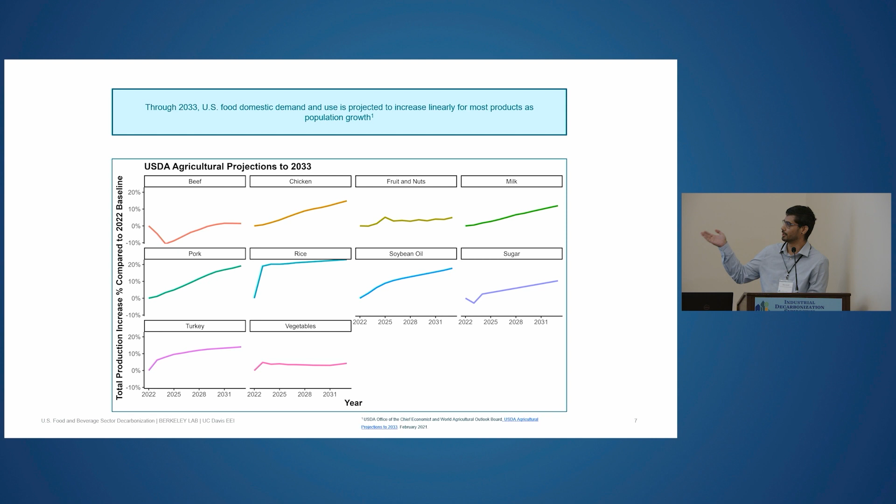To contextualize the US food and beverage sector, looking at the F&B facilities and how production is projected across 2033: USDA projects a linear increase in many food commodities and products across 2033, increasing all the way up to 2050. You can see in the graph below that there are a lot of products that will see up to a 20% increase in production. So we're already having to decarbonize whatever is in front of us in terms of emissions, but there's also a lot of hard work needed in the coming 10, maybe 20 years, across 2050.

There are about 41,000 F&B facilities in the US, and they generate around 8% of US overall industrial emissions. In the diagram on the bottom left, you can see it's more than cement, and almost equal to iron and steel—so it's an energy as well as emissions intensive sector, that's for sure. It also represents 2% of U.S. economy-wide emissions, so that's a lot. This diagram on the bottom right is from the Manufacturing Energy Consumption Survey, 2018 MECS data from US EIA.

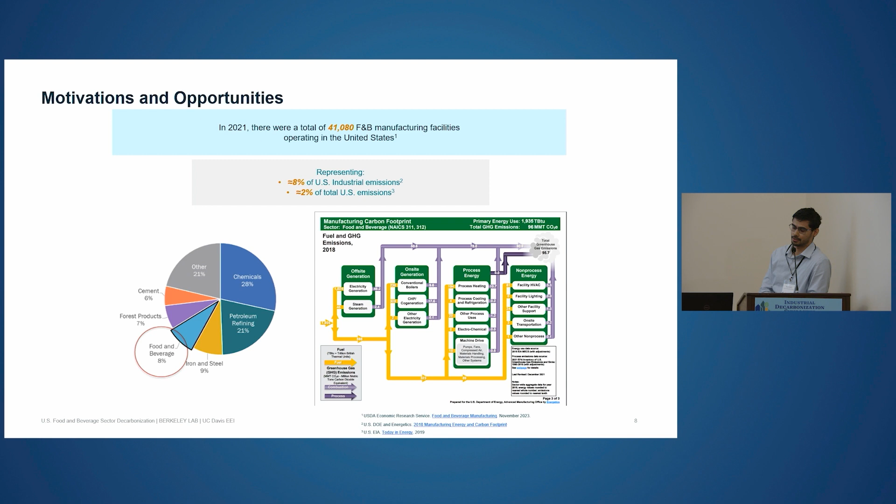So what it pretty much tells you is the scope 1 and scope 2 emissions on a national scale is divided in a ratio of around 50%, right? All the way on the left of that chart, you can see it's around 48 million metric tons for purchased electricity related scope 2 emissions, and overall emissions is 96 million metric tons of CO2e, which is on the top right of the chart. And then the remaining emissions, which is...

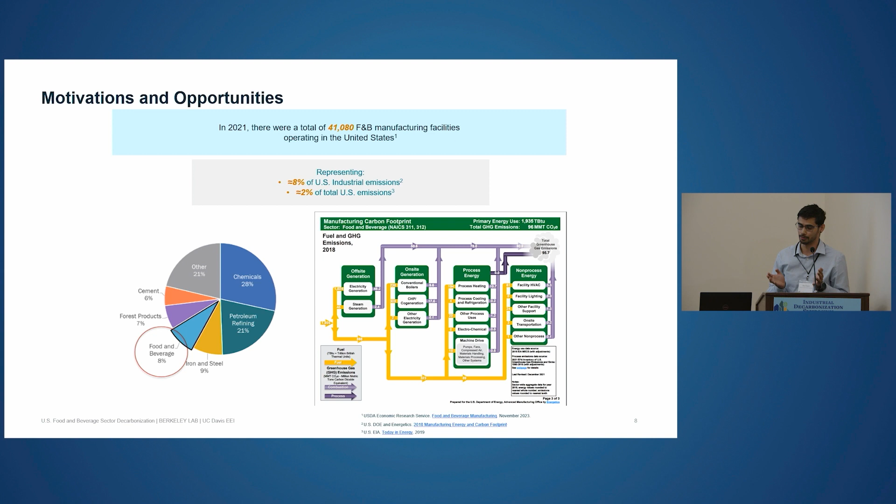...the remaining 48, that's really your scope 1 emissions, mostly from stationary combustion within the sector. And that's a lot of emissions. These are primarily driven by your CHPs, your boilers, your process heating, your HVAC, and all that. So we really need to look into that. That's what we tried to look into here.

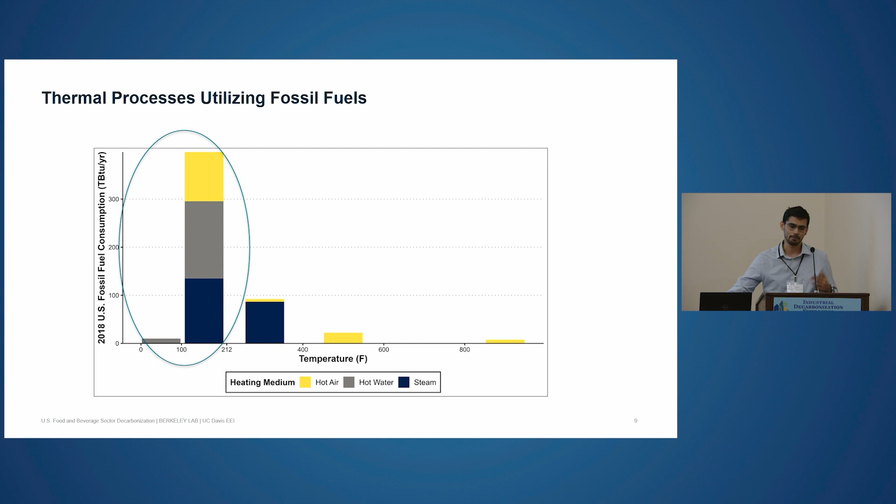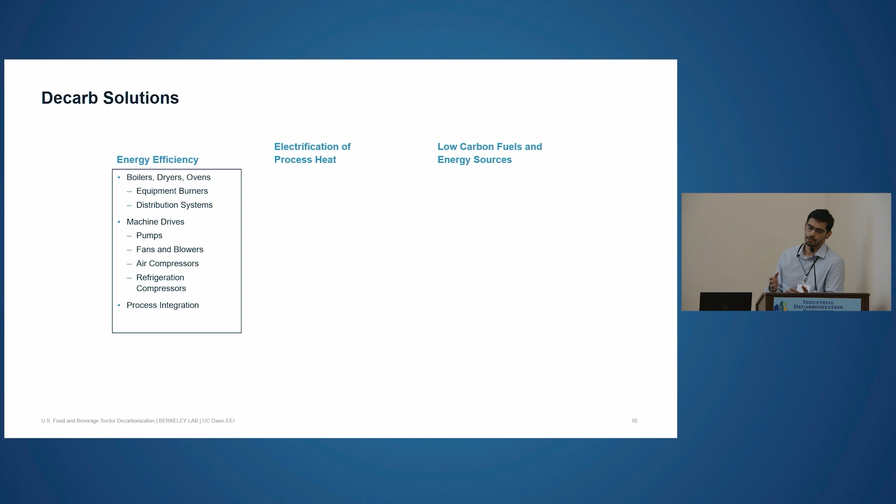From our collaborative work that Prakash and I are doing for the Industrial Efficiency and Decarbonization Office from DOE, on the industrial decarbonization roadmap report, we've identified 3 different decarb pillars. As per DOE, there are 4 decarbonization pillars, but we thought the scope of CCUS for this sector is limited. There might be cases here and there, but it's not really as representative. So obviously there's EE trying to look into equipment level, but not just that, we also need to be looking at distribution systems, right?

Even if you electrify some of your thermal equipment, you're still going to have the distribution system, and they need to be really efficient. Machine drives, process integration, so you can utilize different heating and cooling processes and integrate them with heat exchangers or heat pumps, and that's going to reduce energy consumption.

Electrification of process heat - hot water and steam generated by heat pumps, they have a lot of scope. This sector primarily will be driven a lot by electrification. That's why these equipment are really important.

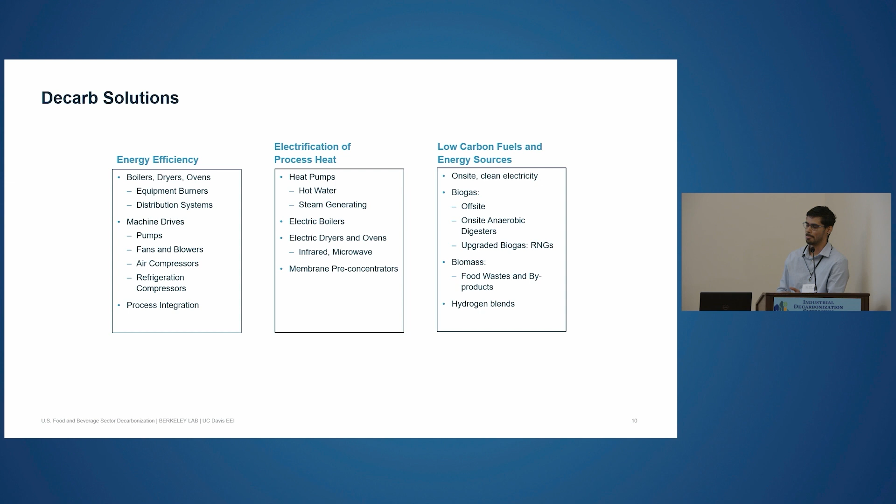And then there's low carbon fuels and energy sources. So generate your own on-site clean electricity, but also biogas. You can get off-site biogas, but you can also utilize your food waste, which is really prevalent within the sector, to get on-site anaerobic digesters originating biogas. And if you have a lot of it, you can upgrade it and utilize it as RNG or sell it as well.

There are additional opportunities in terms of advanced combustion as well as refrigeration. So there are a lot of different decarb solutions for the sector, and this is by no means a comprehensive list, but this was some of the stuff that we looked at.

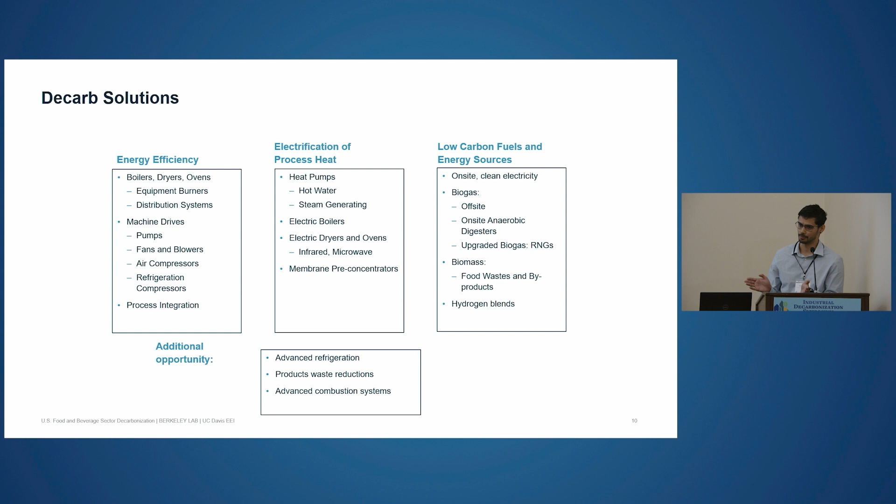Now, with that being said, we wanted to contextualize the food and beverage sector. There are around 6,300 facilities operating in California. These 6,300 F&B manufacturing facilities represent around 15% of the total US facilities, and that's a lot, and it's by far the largest. I think the second is Texas, which is around 4,000 facilities. So California is by far the largest.

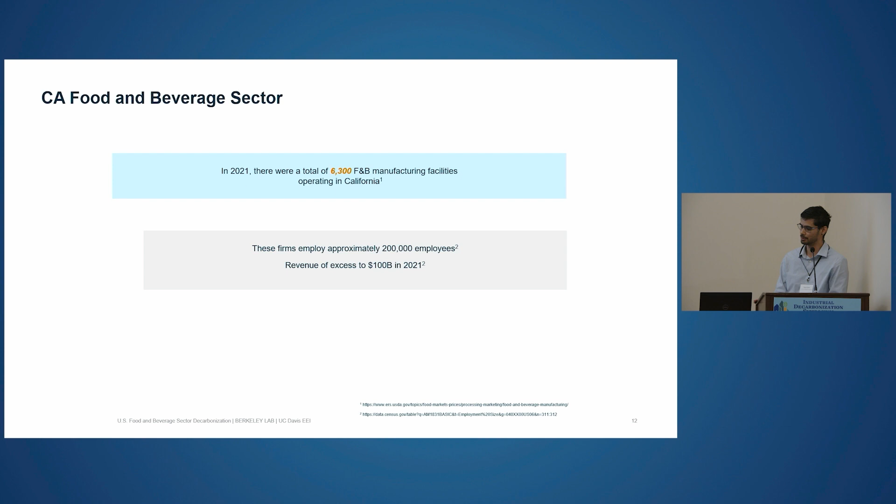A lot of revenue, a lot of people being employed, and also a lot of emissions. It represents greater than 7% of US F&B sector Scope 1 emissions. This is based on 2022 CARB mandatory GHG reporting program. These are only based on the facilities that really reported to the program, and there were around 100, so we're still not including all the thousands of different F&B facilities here. So they do represent a lot of Scope 1 emissions, as well as Scope 2, obviously.

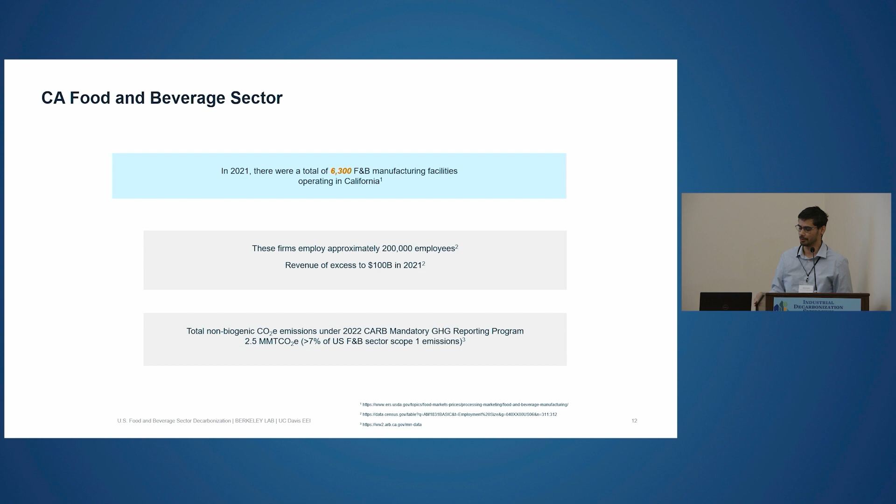So to look at a prototypical facility that might be operating in California and quantify the decarb solutions and their importance and their carbon abatement potential, we developed a prototypical food facility. This is based on 2018 MECS data, and you have your usual high-level processes: boiler, process heating, CHPs, and all that.

We utilize a Sankey tool, which generates this Sankey diagram on the bottom right. This is a tool we developed with our collaborative effort between LBNL and UC Davis. It's on the industrialdecarb.lbl.gov website. What it really does is generate a carbon flow of your facility. Based on whatever energy your processes or equipment are using, you just plug them in and get this diagram.

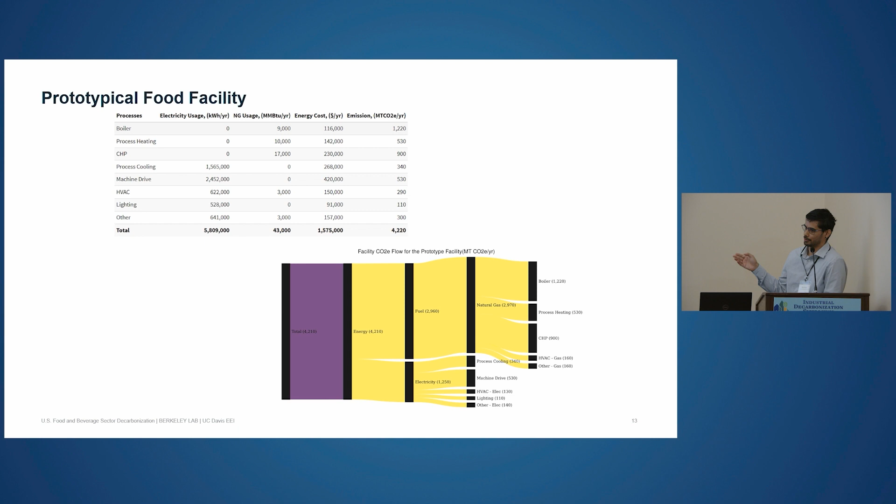So that's really the emissions. As you can see, it's a bit different from the first chart that I showed, in the sense that I mentioned the Scope 1 and Scope 2 emissions is 50-50 on a national scale. But if you look at California, it's more like 70-30, because the grid is cleaner in California compared to national grid emissions factor. So it's a bit different, and we're really looking at Scope 1 emissions. Not to diminish the importance of energy efficiency in your electric equipment, but yeah.

So this is basically the gist of the result. We looked at, for the year 2022, two different scenarios: one without energy efficiency, and the second one with energy efficiency included. In the first, we included just electrification and low carbon fuels. In the second, we included electrification, low carbon fuels, and energy efficiency. We did this to highlight the importance of EE in terms of carbon abatement, but also in terms of what the cost implication looks like when you do energy efficiency and when you do not.

So the first diagram—this is another of our tools that came out through our collaborative effort with UC Davis Energy Efficiency Institute. It's called an LCAC plot generator. What it really does is create a graph that has annual carbon abatement on the x-axis and carbon abatement cost on the y-axis. So it's an LCAC plot, that's levelized cost of abated carbon, or avoided carbon, whatever you want to call it. It contextualizes, or puts these different measures on a graph, and lists out what the cost would look like if you want to implement it, and how much carbon it's going to abate on the x-axis.

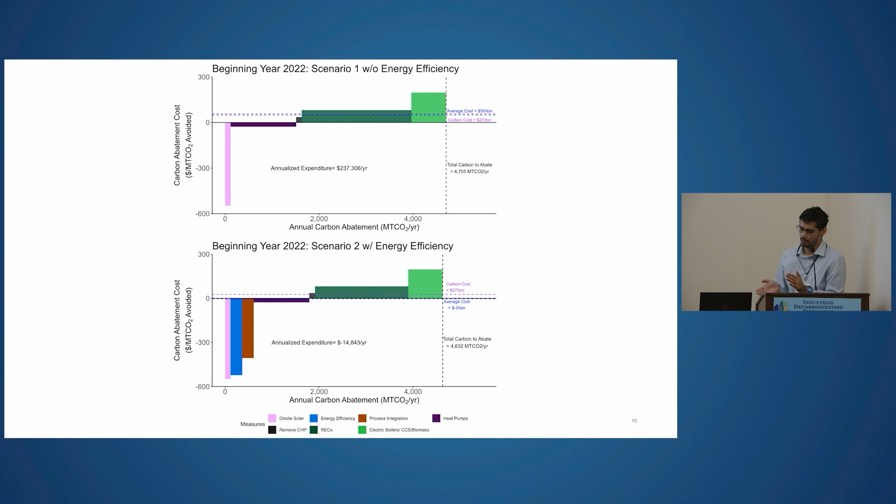So if you just look at the annualized expenditure at first, there's a stark difference between scenario 1 and scenario 2 in terms of annualized expenditure and average cost. The average cost comes around $3 per ton, minus $3 per ton, which is really different as compared to the $50 per ton of carbon cost abatement.

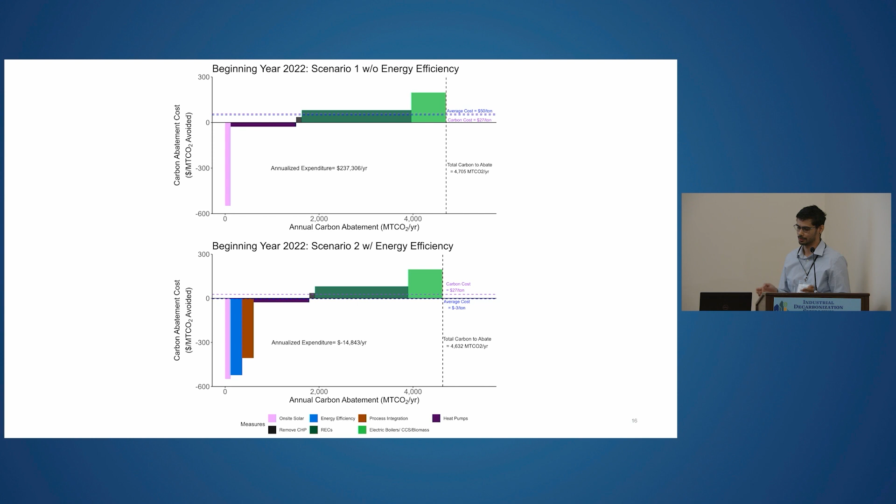If facilities find it cost effective to perform these measures - on-site solar, energy efficiency, heat pumps - that are lower than the cost of carbon in the state, that's one way to start doing it. Energy efficiency measures have to be done either ahead of time or simultaneously with other measures. Otherwise, everything's gonna be way more cost prohibitive, and nobody wants that.

So finally, with all the opportunities that I lined out here, I want to end up with some of the barriers, because nobody wants to put in a high temperature heat pump as the first person. I don't want to install it as the first person and then maybe lose money on that. People just want to look at it, and then once others are doing it, they want to start.

In this sector, there's this issue related to food and safety compliance and whatever customer perception it is. People want to have the stuff that they have always gotten - the conventional stuff - they don't want change.

And a really important stuff is high CAPEX and OPEX in terms of these decarb measures. This high CAPEX is normal, but in electrification, because electricity is so expensive, it really is cost prohibitive. So even if you have a heat pump with a COP of 4 or 5, there are some cases where your annual expenditure in terms of electricity is going to be way more than what you're already paying.

So there are issues like negative payback. If you don't have savings, you don't have a payback, so what do you do? There are these cases that really need to be handled. But there are far more opportunities as well for the sector in terms of decarbonization. So with that, I want to end my presentation.

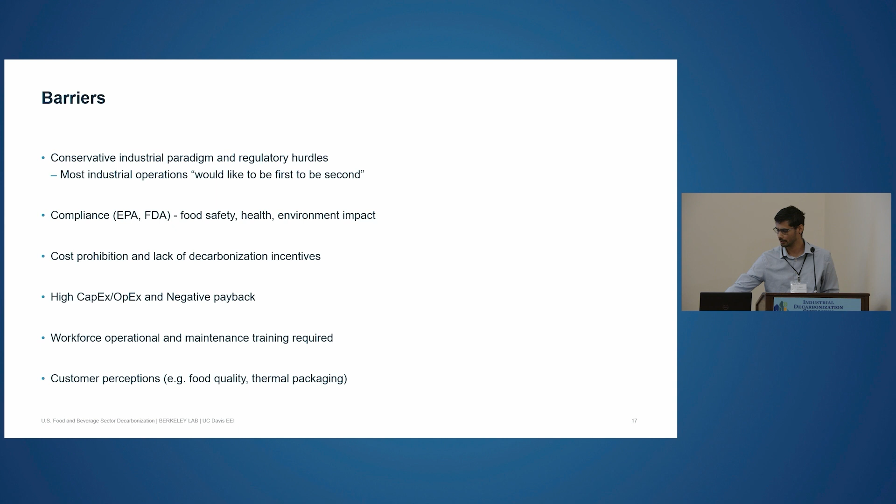Ben, are we taking questions now, or? Let's go. Let's actually take a moment for 1 or 2 questions. Okay. So we have a roving mic, and I will leave the mic to the rover. Any questions?

Yes, Steve. Well, I don't know if it's a quick question, but when you were showing the cost of carbon, solar was highly negative cost of carbon and heat pumps were slightly negative cost of carbon, and you said something about heat pumps being economically viable, but they're not because of the spark spread. I just didn't understand that. Can you talk a little more about how heat pumps ended up as a negative cost of carbon?

So two different major things. For that analysis, we assumed all the electricity that the heat pumps or any other electrical equipment are going to use is going to be totally clean. That's why we included on-site solar-related electricity and also RECs, renewable energy credits. The other thing was we also included the cap and trade-related costs in there, so $27 per ton, which really reduces the cost. Due to these two reasons, the cost of heat pumps came out - I think it was around -10.

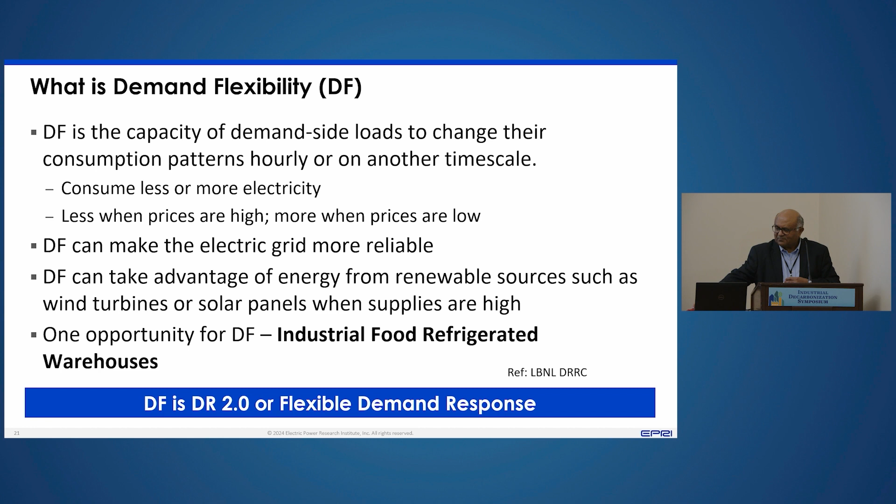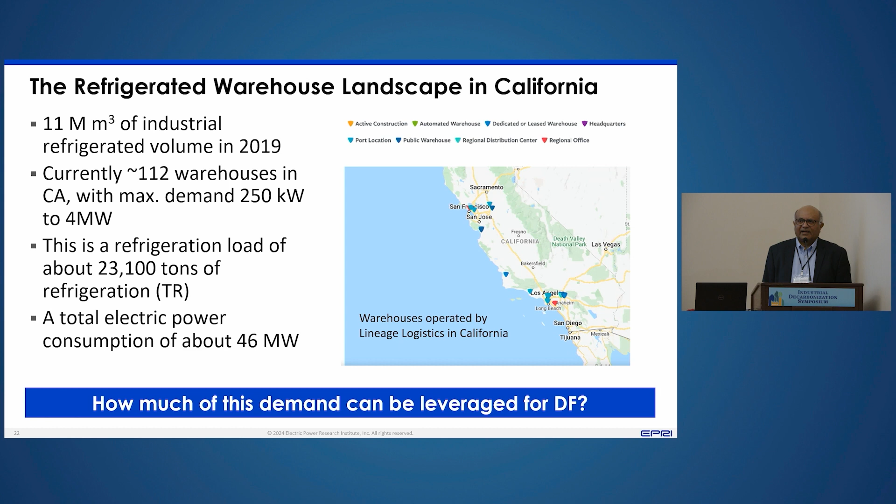So how can we do demand flexibility in refrigerated warehouses in California? California, as you know, is really big in food processing. We heard this earlier on, and consequently, the food has to be moved around. So it's very big in refrigerated warehouses, because we need to store the food products at some middle point before it's delivered to the grocery stores and to your and my home for consumption. So there's a lot of power that these warehouses use for storing refrigerated foods, and the idea is how can we make them more flexible and more efficient.

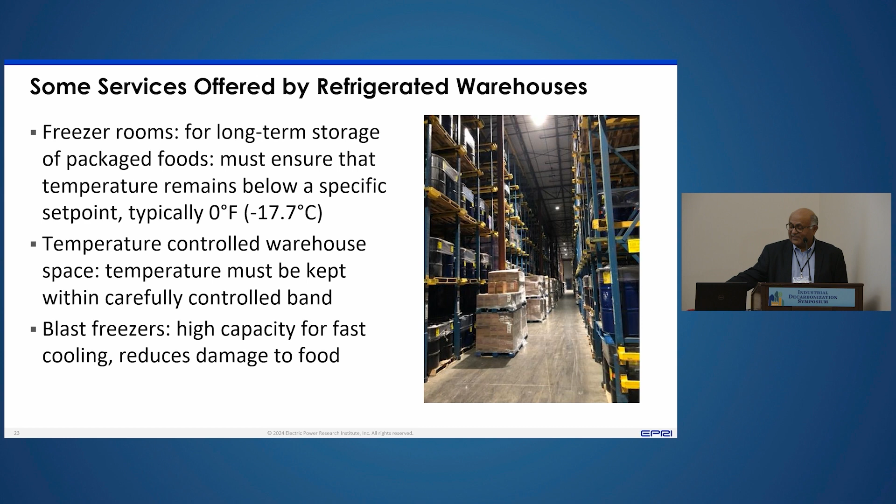These are all the services that are offered by these large refrigerated warehouses here in the state of California. But the biggest ones are these freezer rooms. Food is stored mainly around 0 degrees Fahrenheit, but ice creams need to be stored at a much lower temperature. They also use things like blast freezers. This is very interesting in the sense that if you want to freeze chicken as it's being processed, you do blast freezing so that you freeze it immediately. More of the skin is frozen so you can use it as fresh food later on. So it's a very interesting business.

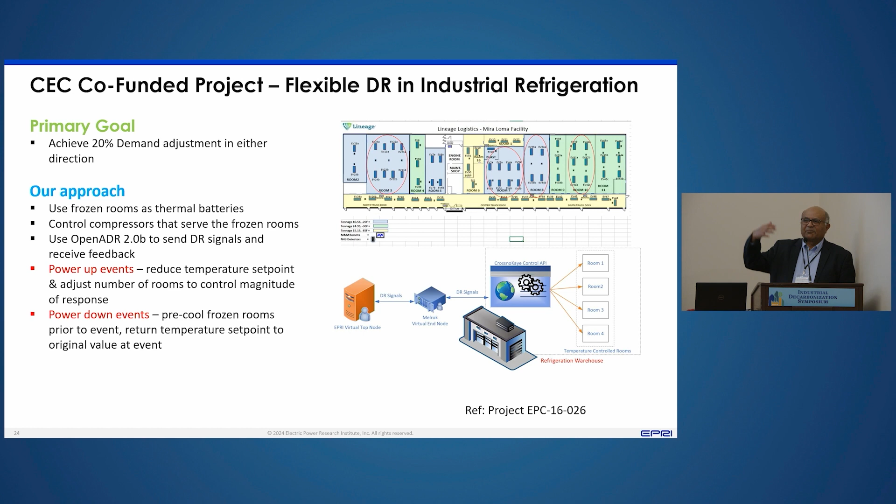So we were very fortunate to be awarded a grant from the California Energy Commission to look at this sector and see: can you achieve 20% demand flexibility both up and down? And one way to do that is to use some of the newest communication protocols, especially OpenADR 2.0b, to send signals to the controllers in the food warehouses so that the power can be increased and decreased. So this is really what the project was.

So we worked with one of the largest warehouse companies in the country. Lineage is probably one of the largest in the country and probably in the world. They've got many warehouses here in California and around the country. We worked with one in Mira Loma. Mira Loma is very close to Riverside, if you know that area. Pretty hot place, but huge warehouses there, including Amazon warehouses. So this is a very large warehouse that we did our experiments in.

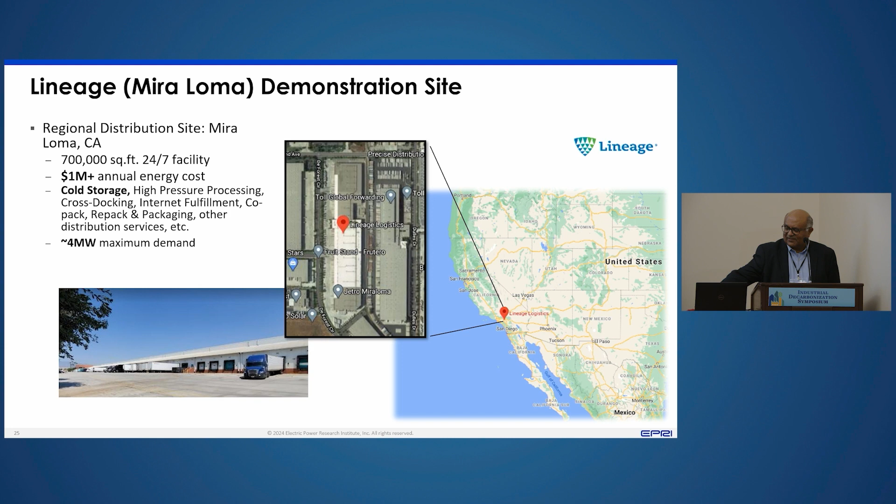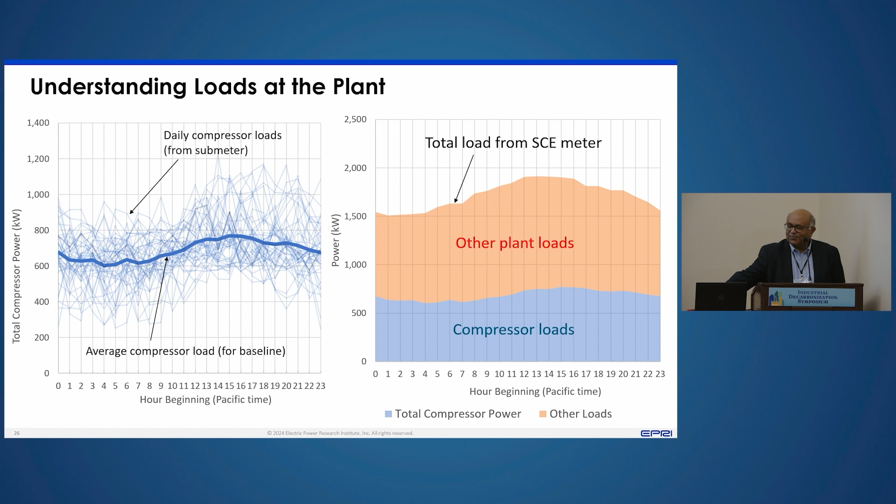So what we did was, we used the OpenADR 2.0 communication architecture, sending signals from our own server. Because this is a test, we couldn't use the demand response automation server from any of the utilities. Southern Cal Edison is the utility there. We couldn't use it because it's an operating plant and it's an experiment. So we have our own DRAS or VTN, virtual top node, where we can send OpenADR 2.0 signals.

So we sent those signals. Those signals were grabbed in the cloud, and the signals were sent to the plant. And we worked with the company that configures the operation of the plant so that the plant can use electricity more appropriately. In other words, can it turn off some compressors? Can it turn on some compressors? Can it overfreeze the food? Things of that nature.

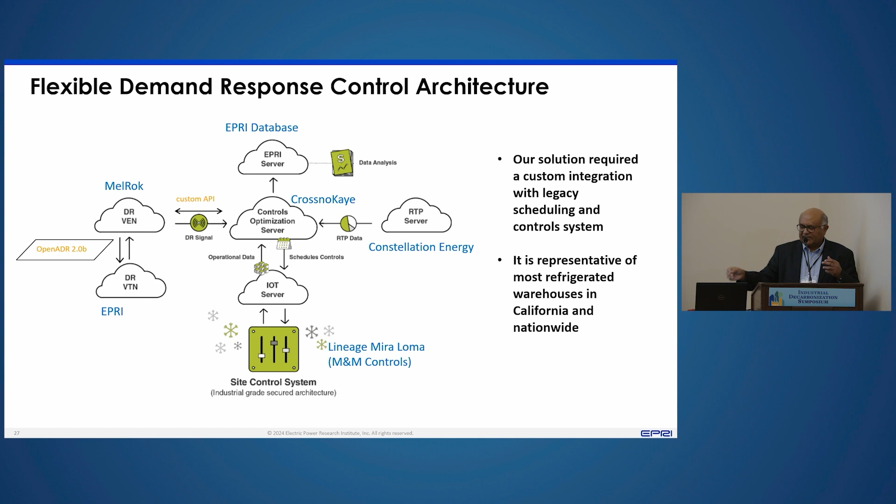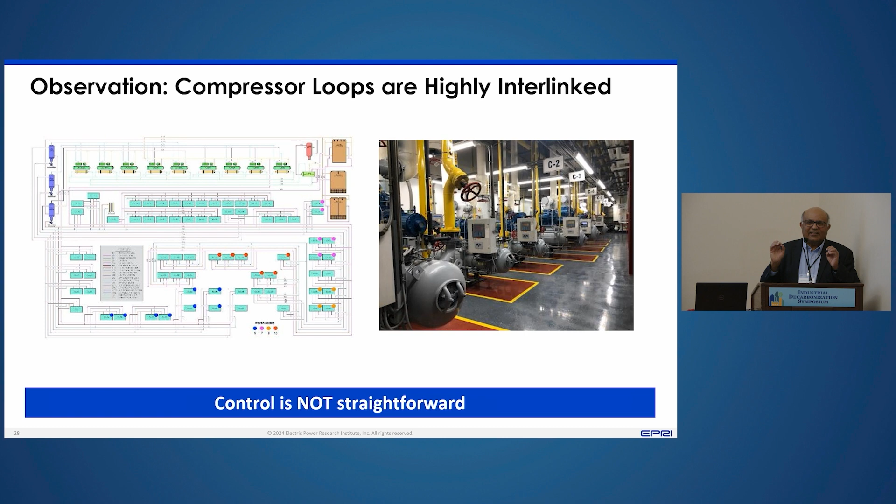But what's interesting that we found was that the set of compressors they have in the plant are all interlinked. So if you increase the power usage in one refrigerator room, it affects the other rooms. So you've got to be very careful. You've got to do it very finely tuned. So it's really a warehouse by warehouse application that we need to do. So we were able to send signals, that's the most important part, but to control it up and down was rather difficult.

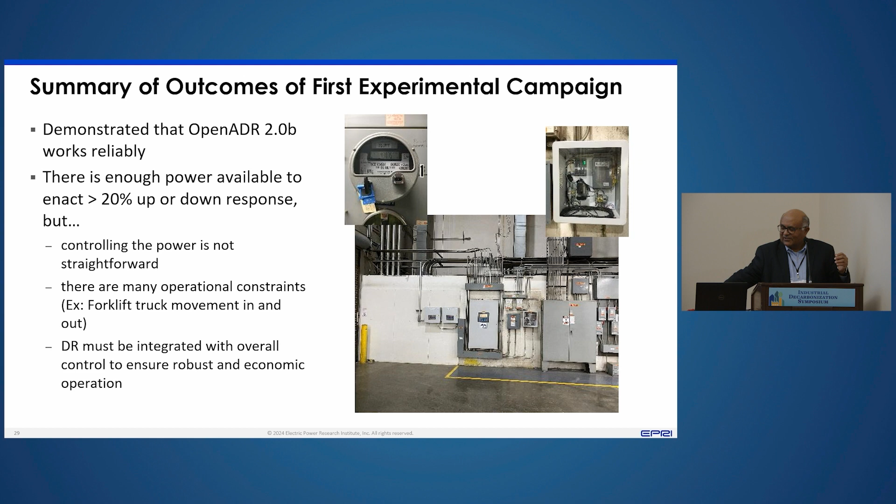What is most interesting in these warehouses: think of a warehouse as a thermal battery. If you compare it with a battery, it's sort of in the discharged state. In other words, each one of these rooms is kept at a very tight temperature, so you cannot just let it float or increase the temperature because it will spoil the food. So what one has to do is make the rooms use more power. In other words, power up first, and then you can power down. So if you have an emergency signal for the next day, that you're going to have a problem on the grid, today is the time to power up, to use more energy and store the thermal mass. So it's a very clever way of operating, and we did that.

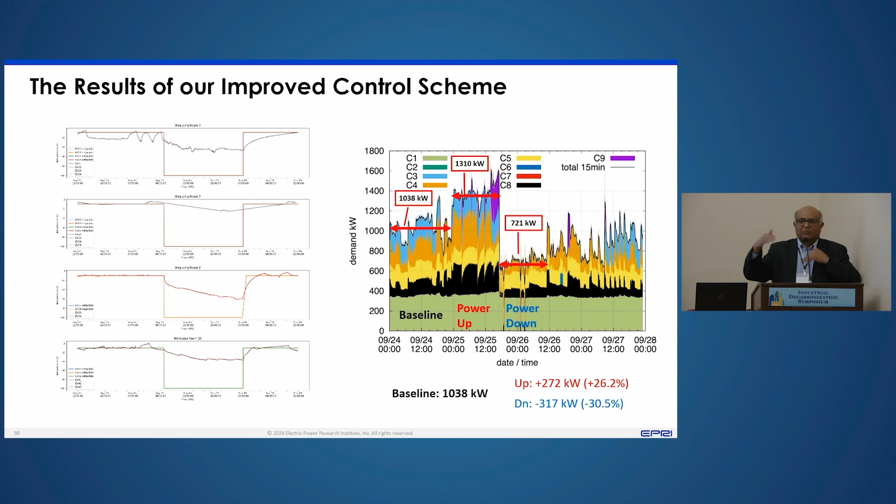And what we found was we were able to power up and power down by about 30%. Actually, power up by about 26% and power down by about 30%. We were able to do that only for the compressors. Remember, compressors are only half the plant load. I'll just skip to the next slide.

So I told you that there's a lot of other power that's used in the warehouses. There are floor heaters. Every food warehouse has to have floor heaters because if there's a thermal gradient between the frozen room and the ground underneath it, the ground will buckle, and your forklift trucks can't go on top of that. So the floor has to be heated, by some sort of electrical method. This plant has 700 kilowatts of electrical resistance heaters that you can just turn on and turn off. You can connect that. We didn't know going in, otherwise we would have connected that also.

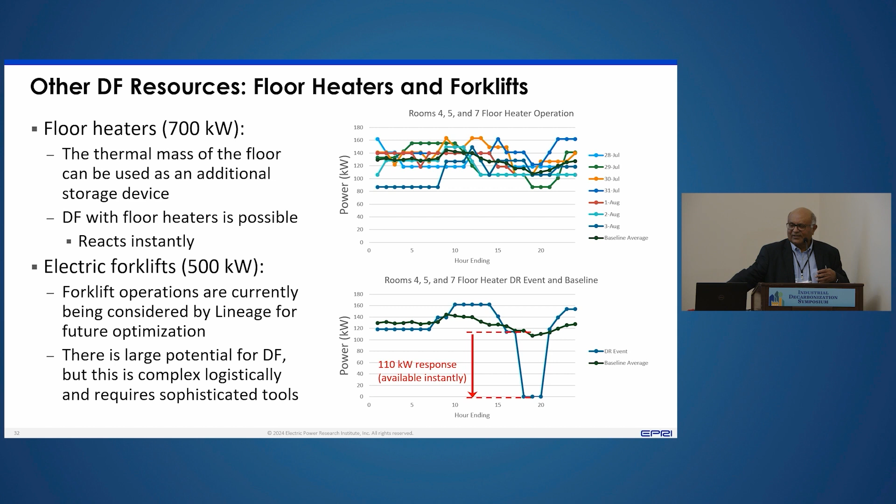And the second thing is that they use a lot of electric forklift trucks. Obviously these trucks are the ones that move the food in and out, so a lot of power is used there. And you can do demand response or demand flexibility on those also. You can charge at appropriate times. There's a lot of research going on charging vehicles like that.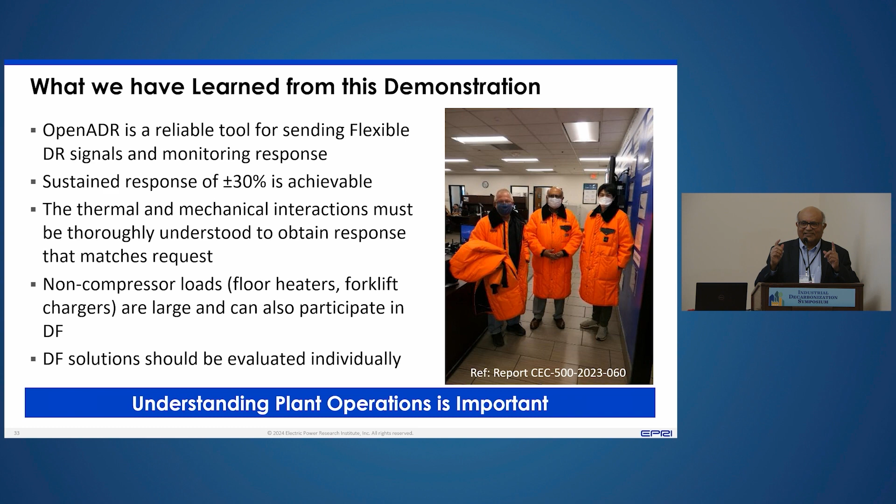So we learned a lot from this. OpenADR can be used. We can do demand flexibility in such warehouses. But what is most important is you've got to understand the plant, exactly how the plant operates. Only then can we do that.

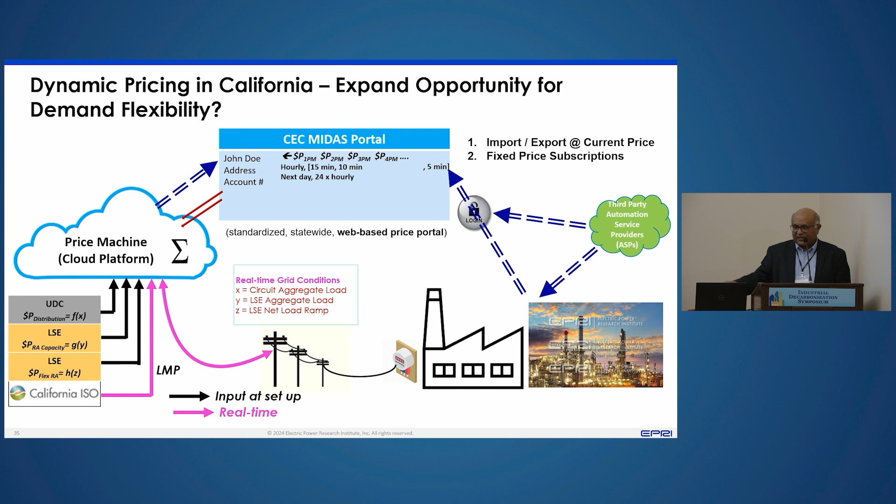And then aggregators or automation service providers can pull those prices and do some interesting things with the customer. For this food processing plant, for example, if the prices were dynamic, then the automation service provider or maybe even the plant could pull these prices and do some tricks, turning the temperature up or down or whatever it is. So this is a very interesting opportunity for food processors to take advantage of flexible prices as they come up. So with that, I conclude my presentation.

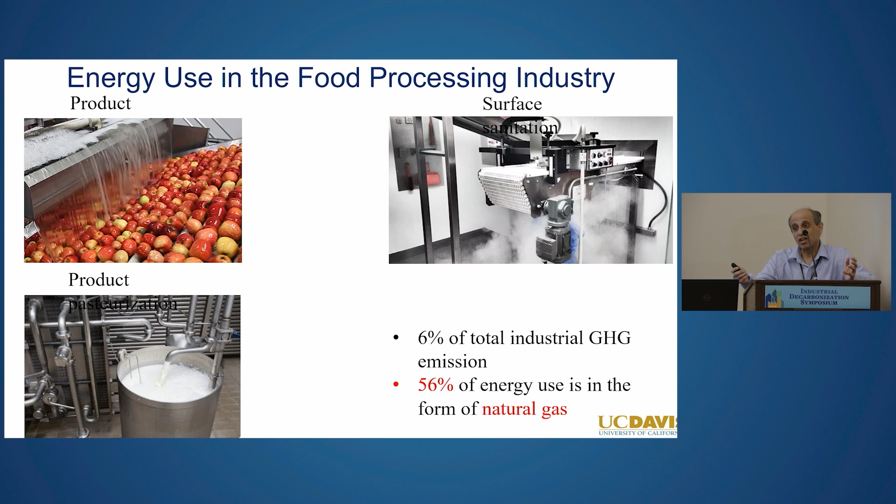We cannot recover the value of that heat as it is being used in the industrial operation, and I'll go into why that happens. In terms of the emissions, a significant amount of energy comes from natural gas in food processing environments to date.

Now I'm going to talk about a process called CIP. It stands for clean in place. Essentially it means that you don't have to dismantle the food equipment, you clean it as it is. So imagine you're in a kitchen and you've got a complicated machine that you need to clean. How would you clean it without dismantling it?

What you do is profusely wash with hot water at very large volume, in the range of 80 to 90 degrees centigrade. This is recommended because you don't want cross-contamination from microbes that may have built up in that unit while processing food in the previous shift. So that is required for safety.

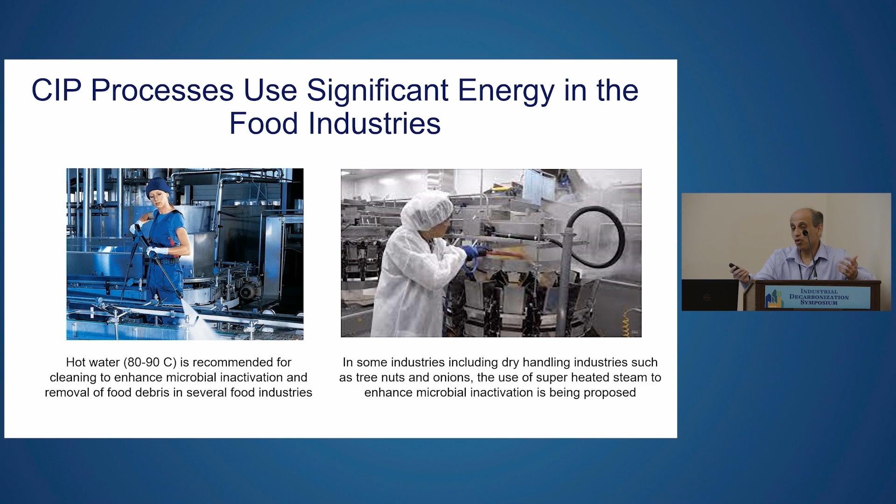Now this gets extreme when we look at certain industries thinking of using steam instead of hot water. This is mainly driven by industries where we cannot use water to clean at all. There's a range of industries, like tree nut industries, where we don't introduce water at all because they're dry environments. So they use superheated steam in those cases to prevent condensation, but then you're increasing the amount of heat used in the cleaning operation. The goal is still to inactivate microbes in both these processes.

If you look at some of the common industries well grounded in the California system, the dairy industry and the fruit juice industry, these are some estimates of energy use, and they're huge in terms of teraBTU amounts. If you look at it, we spend this much energy processing food and this much cleaning it. We're spending about 30% of the energy on cleaning compared to what we use in processing, in each of these operations.

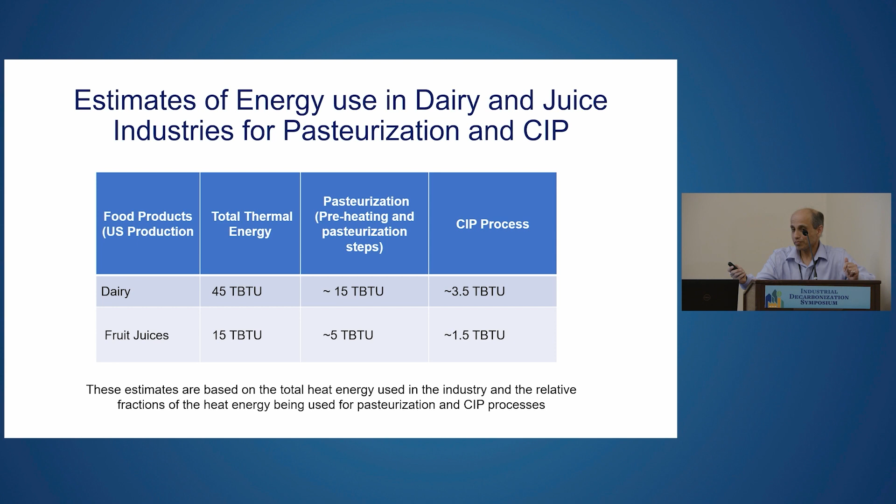And then sometimes we get an issue with food safety. For example, you have a recall in a commodity like cantaloupe. I don't know how many of you follow the food industry, but often there are recalls because of food safety challenges. For example, this is news from 2023, where we had a cantaloupe recall in 19 states. As a reaction to that, the food industry decides, well, what we need to do is actually process this fruit, which is a minimally processed commodity, and start thinking about treating it with heat.

If you do a brief calculation, even if 10% of those cantaloupes sold, about 570 million cantaloupes in the country — we really love cantaloupes in the nation, in all forms of melon — we would be using significant amounts of energy and contributing significant carbon dioxide. So these events take place in the industry, and that changes the entire dynamics of how we think about food itself. I just want to highlight some of those aspects. Again, the goal is to inactivate microbes, so a large amount of energy in the food industry is driven by the motivation to inactivate microbes.

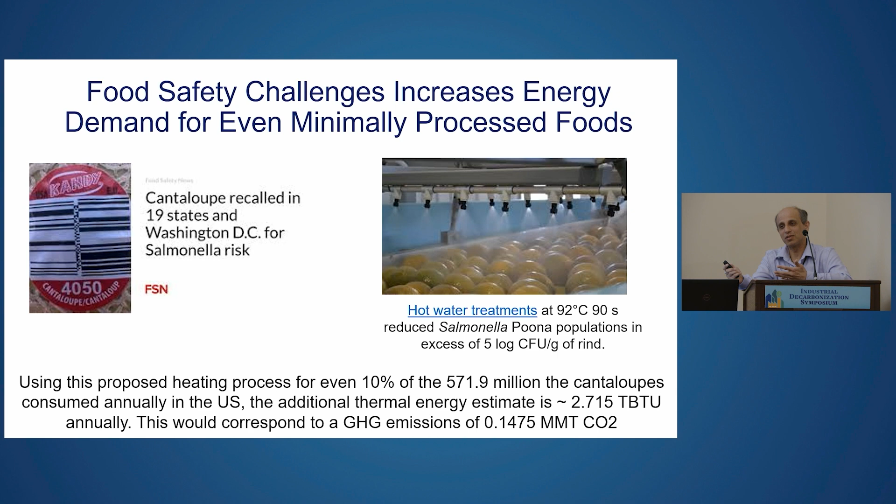And so that made us think about the next concept: catalysts. The chemical industry has done significant work in the catalyst area, where catalysts are used predominantly to lower the energy barrier. So things that don't happen at certain temperatures — we can introduce a catalyst concept that lowers the energy barrier and makes the process a lot more efficient.

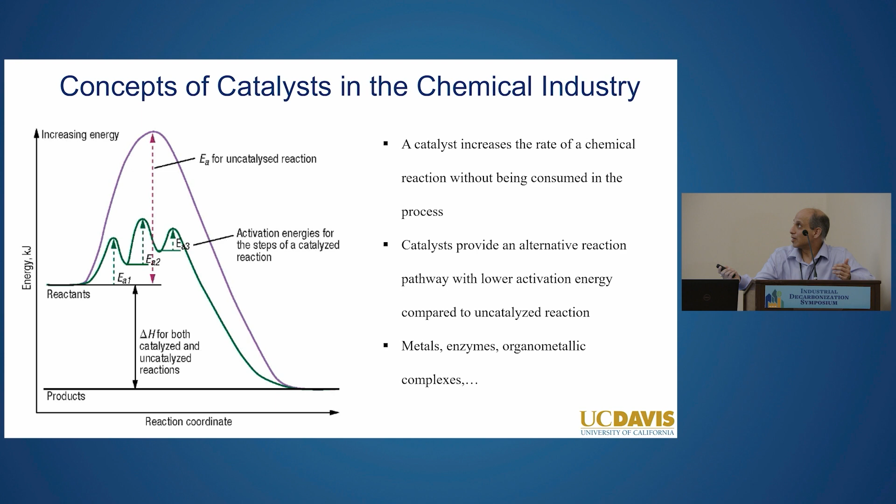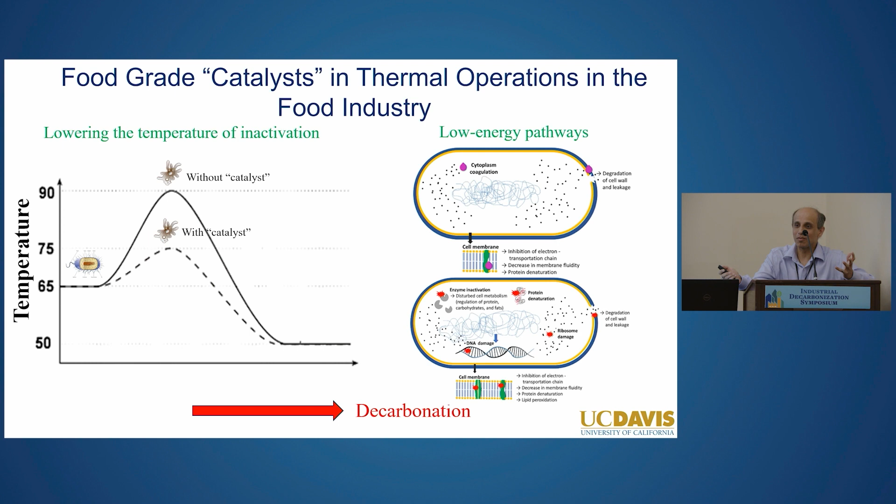We thought, okay, how can we do this with food grade materials? Can we do this with simple materials that may interact with microbes? As I said, microbes are the target — materials that may interact with the cell wall or membrane, or with intracellular components of microbes, but these compounds by themselves are food grade, so they are not antimicrobial. But when combined with other energy sources, they may become activated and lower the energy barrier. So if a food processing process takes place at 90 or 100 degrees centigrade, maybe we can lower it down to even 55 degrees centigrade. And if we can lower it enough, we can start thinking about using waste heat — the heat coming from spent sources — rather than using active heat from more fossil fuel burning.

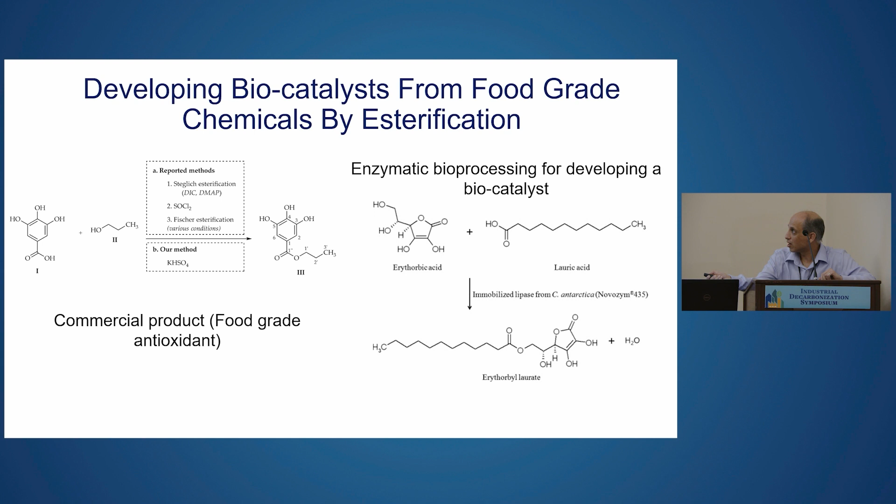The reason we are doing this is to enhance their penetration into membranes of the cells. So that's why we're doing it. And these are food grade modifications. So when you eat this product, it breaks down in your stomach, releasing the fatty acid and the vitamin C derivative separately. The same thing happens here, releasing the carbon tail, a short alcohol molecule, with the phenolic acid separate during your digestion.

So we looked at this process of looking at, can we do pasteurization, for example, of apple juice at much lower temperature than you'd typically do it at? So we introduced at room temperature this molecule called propyl gallate, which is a commercial antioxidant, at different concentrations in different juices. You don't see any inactivation. So the compound by itself does not do anything. But when we combine it with mild heat, by the way, heat also doesn't do anything.

This is a sample without PG, which is heated, in the gray bar. So heat at 55 degrees centigrade doesn't kill microbes, by the way. That's why we need much higher temperatures to kill it. But when this compound is present in combination with this heat, it actually achieves significant inactivation.

Now, this is not a linear scale, this is on a log scale. So that means we are achieving a 5 log reduction, which is 99.999% reduction, required for pasteurization in this case. So this illustrates an example of a food grade compound and low heat creating a synergistic combination that leads to inactivation of microbes, lowering the energy barrier, and potentially lowering the carbon footprint of the processing industry.

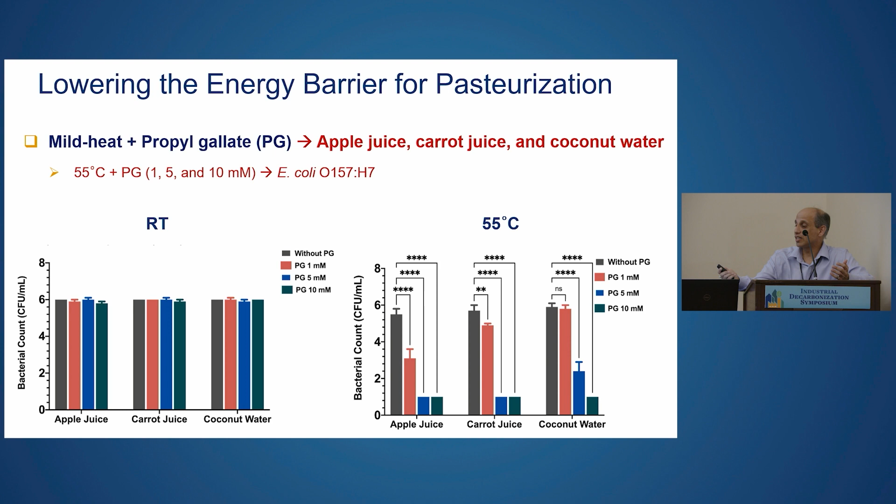Not only that, it reduces the fouling. Actually, the reason we use so much water to clean in the first place is because we use high temperatures. When we use high temperatures, food materials tend to deposit on the surfaces. You've all done cooking, so when you boil milk in your pan for long enough, you'll get significant fouling on the container, and it's hard to clean. So you have to use a lot of water and heat to get rid of it. If you can do this at a lower temperature, you reduce fouling, and maybe reduce the amount of water and energy you need to clean it.

So similarly, we did work with milk powder. Spray drying is a process that is quite energy efficient, but it's not a pasteurization process. So we were trying to understand if we could combine spray drying with one of the antioxidant compounds we modified in the lab to actually achieve a pasteurization level in a spray drying process.

So clearly, the compound by itself, again as I showed, does not have an impact. The spray drying does not kill microbes. So if you dry powder, that doesn't make it safe. By the way, we know this because we had an infant formula crisis in the country where powder got contaminated and we couldn't get rid of it. So here, the compound and the spray drying process together achieve a significant level of inactivation.

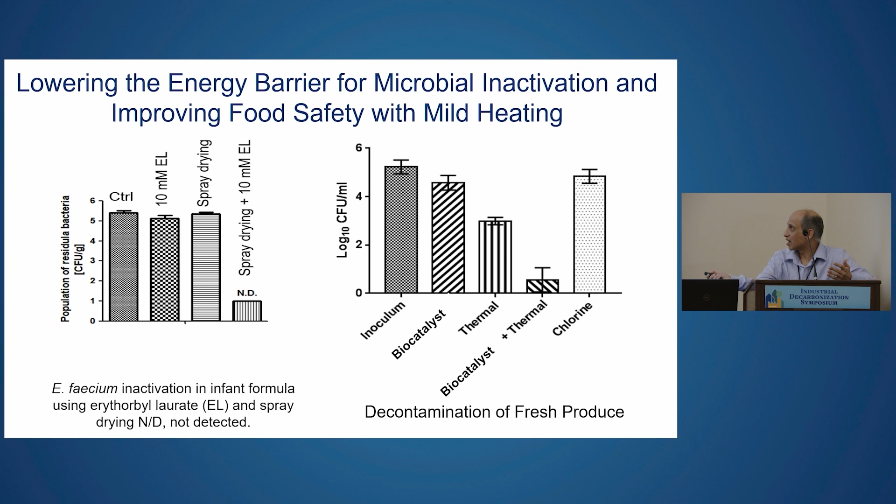We have done a similar process for the decontamination of fresh produce. This was motivated by the cantaloupe issue, looking at whether we can achieve a significant level of inactivation by combining a biocatalyst and mild heat in this case.

Now, the other topic we have been inspired by is that not only do we use energy in making food, we actually waste a lot of food. By some estimates, in terms of carbon emission, that is a bigger culprit than the entire food processing industry combined. So not only do we make food, we waste a lot of it. By some estimates, the amount of food waste is equivalent to running 42 coal-fired power plants, and this is in the US, with one of the best food infrastructures in the world.

Now, if you think across the world, this is a much, much larger contribution, because many countries don't have refrigeration, don't have the supply chain. This food waste issue can be such a big issue across the globe that we could be significantly contributing to carbonization beyond the energy use in this case.

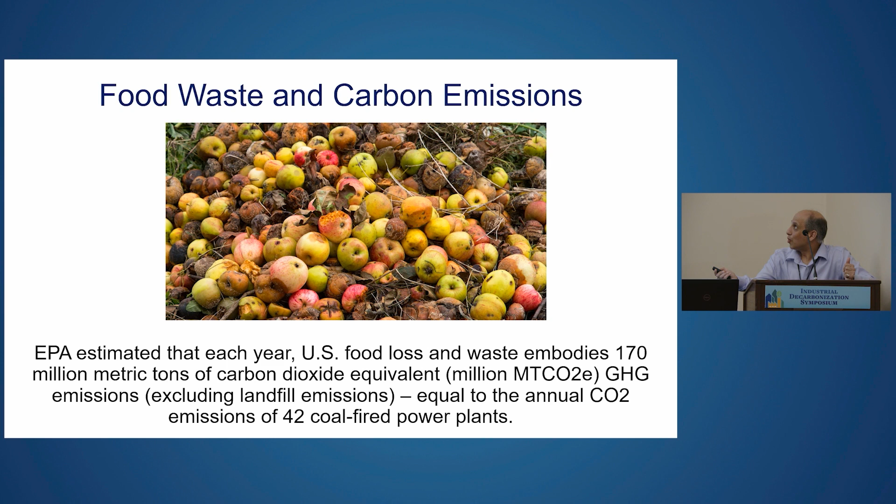So we were thinking about a solution. Again, my lab does a lot of materials work, so we are inspired by materials and their catalytic properties. We were thinking of a process where we could use food waste or food byproduct to actually make something useful out of it.

This work was done in collaboration with Selina Wang, who works on olives and olive oil. We took this collaboration and said, okay, we were isolating those phenolic compounds. Those are very rich in the pomace samples left behind after you extract the oil, so we developed a process of extracting some phenolic compounds from it.

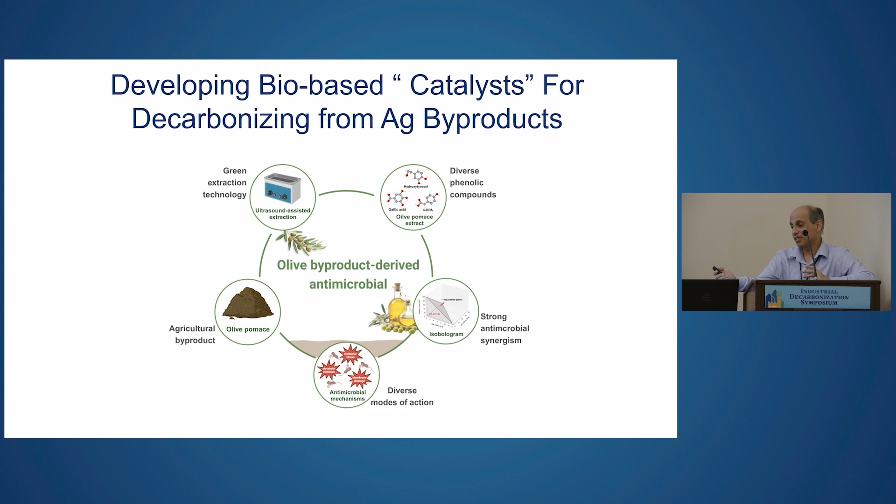Without any modification, we looked at their potential to create some antimicrobial scenarios. We found that these compounds, when present together in this pool, are highly synergistic as compared to individual compounds. That gave us significant insight into how these compounds may be used.

I'll illustrate an example. This is a project we did with an industry, so I won't share the name of the compound or the fruit we were working with in this case. But this is a very high value fruit with a shelf life of 14 days. The industry came to us asking if we could extend this shelf life without impacting the fruit at all. We couldn't introduce anything modified into the fruit, so everything had to be food grade. So we looked at it.

We introduced our combination, which we call OPE, olive pomace extract. This shows what happens to the microbial load without that olive pomace extract. By day 14, you exceed the threshold levels where you start getting fermentation smells in the food, and likely as a consumer, you throw the food away.

If we wash the same fruit with this extract with mild heat at 60 degrees centigrade, you can actually prevent the fruit from spoiling even at 21 days. So we've extended the shelf life by 7 days. Likely you'll consume it by that time, and hopefully we can reduce the food waste problem.

So we're looking at this issue of how to develop coatings and materials that contribute to reducing food waste, but also thinking about how to do decontamination while we're processing the fruit itself.

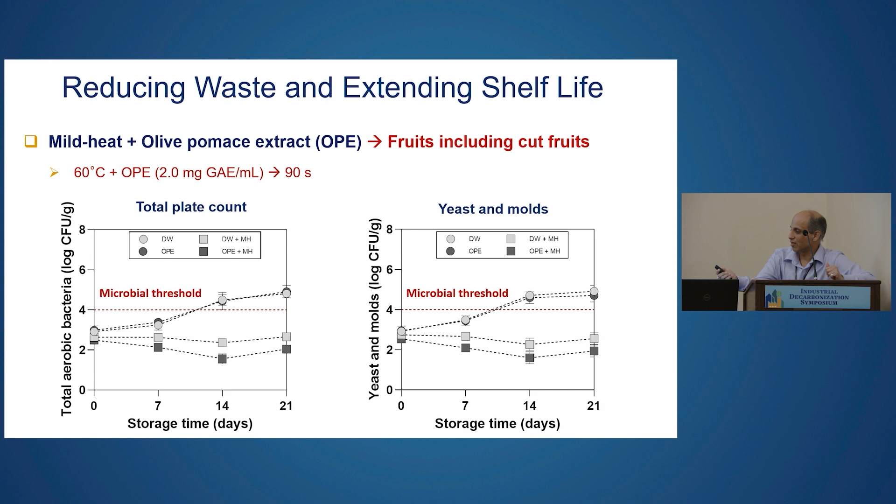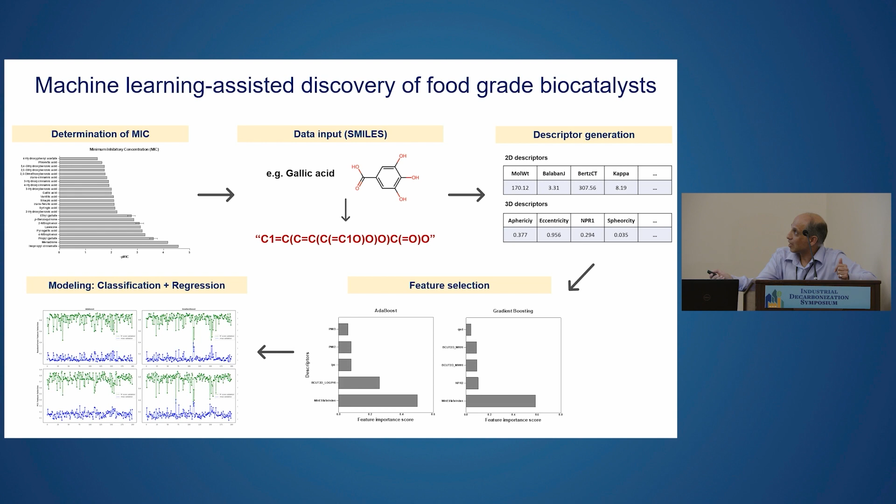As you discover these materials, one role of a university is also to develop fundamental understanding of how these things are working. We've been looking at machine learning applications, trying to predict what functions these extracts and compounds are going to have.

We are using some machine learning tools, and in the interest of time I'll be brief. We're also using NMR-based metabolomics to understand how these compounds interact with microbes and eventually give us the function we require, with the hope that we can optimize this and achieve optimal combinations.

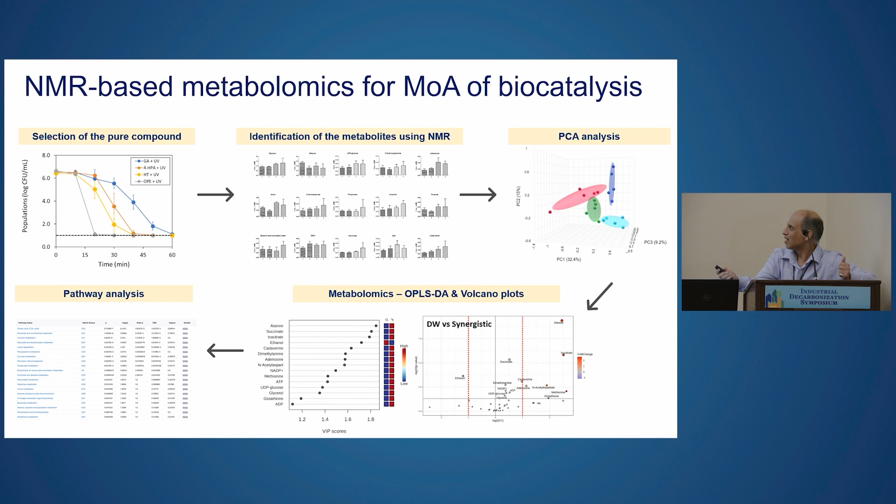Again, this is similar to what a catalytic chemistry lab will do in a chemical industry. With that, I'll stop here and we'll be happy to take any questions. Thank you.

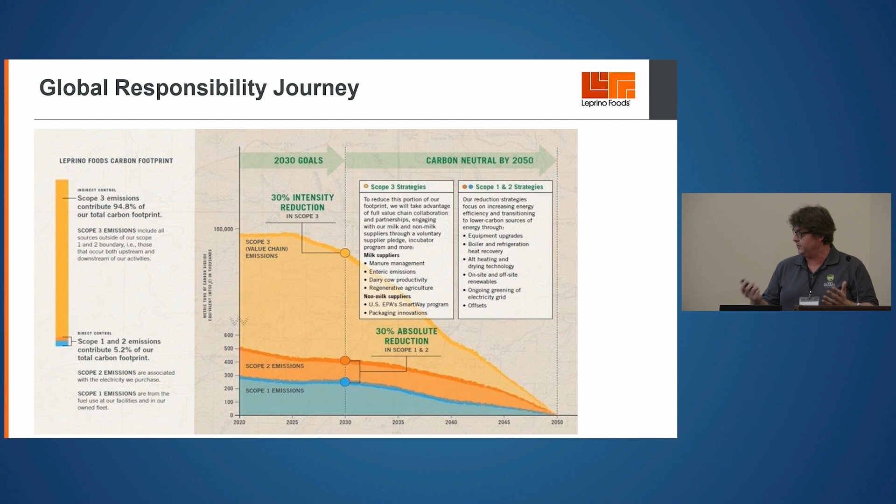So Leprino Foods, we have somewhat a global responsibility journey that we're working on towards 2050 to decrease everything we see in every plant, and we're even building a current plant where we're taking that into account to make sure that we hit our goals.

So we aim to lead responsibility. We look at probably about a 10% reduction every 10 years. It's a big priority for us, and it goes into one of our big company goals and what we want to be.

We installed the ammonia heat pump last summer in July, and we looked at the basic concept of where do we get the heat from for it, and where do we put the heat in? So we're a producer of mozzarella cheese.

So we're taking milk, and my plant takes 3 million pounds of milk a day, and we're making 500,000 pounds of cheese with it. So we have a milk pasteurizer that we're using a lot of steam in. And we have a big ammonia refrigeration system where we use to cool our product, and we have a big storage freezer in our facility as well.

So we looked at the high side of the ammonia refrigeration system from our towers, taking that heat that's just wasted, putting that into a heat pump, and then the heat pump is making it warmer and pushing it towards a reduction in steam where we heat a glycol loop. That glycol loop is repurposing hot water that's heated by steam that is then used for a milk pasteurizer.

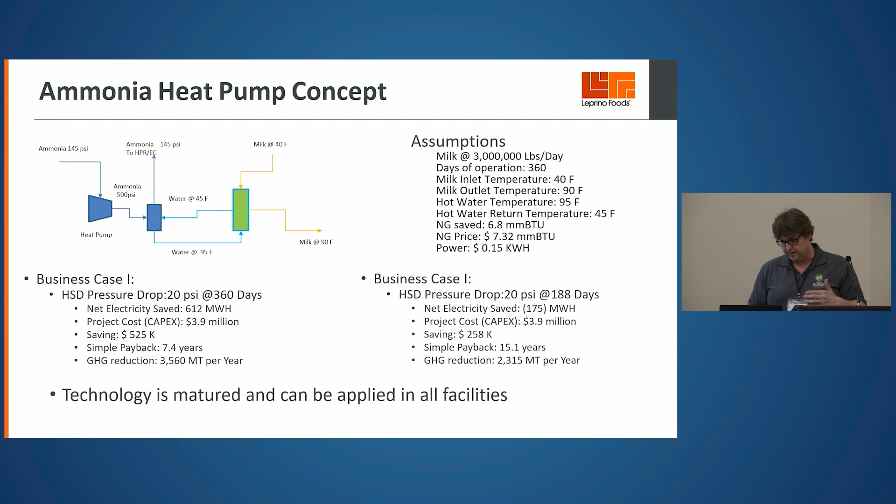So we looked at a few business cases, how much are we going to save, what are we going to do when it comes around to it, and then we came up with a final process, as you can see here, to implement into our system.

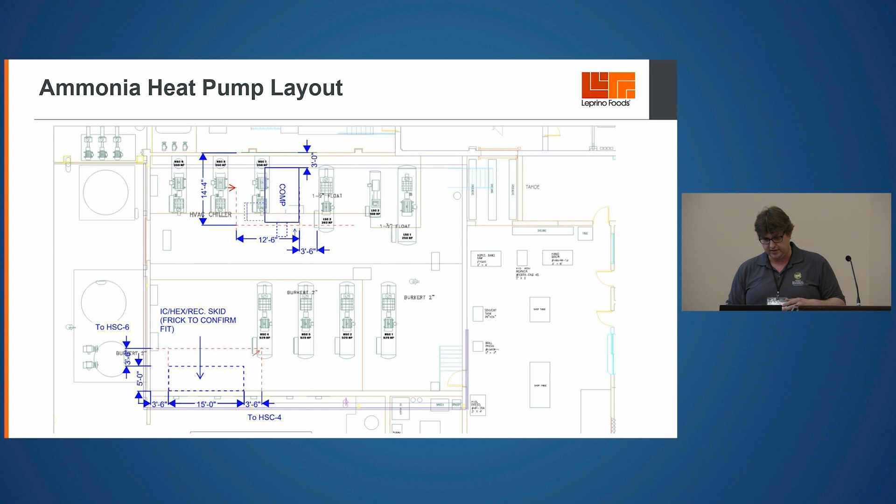And we had to do a little bit of construction in our rooms to make it fit. We had to move stuff around, some old compressors that didn't work, tried to just make it fit. There's 2 components to the setup.

Here's our P&ID for the process for both sides. And here's our compressor—this is one component, the ammonia compressor. That's taking the high side ammonia, and we go from basically running our system at 160 PSI, sometimes 180, but it's boosting it up to about 290, 300 PSI.

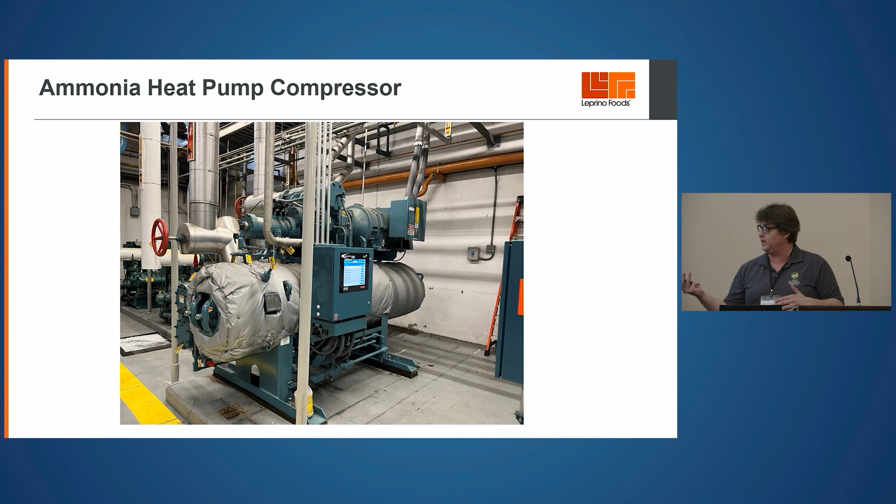And then that goes to our condenser skids. That condenser skid is taking in that now 300 PSI ammonia on one part of a heat exchanger. The other part of the heat exchanger is glycol that we're heating to 125 degrees. And then that's going out to our system.

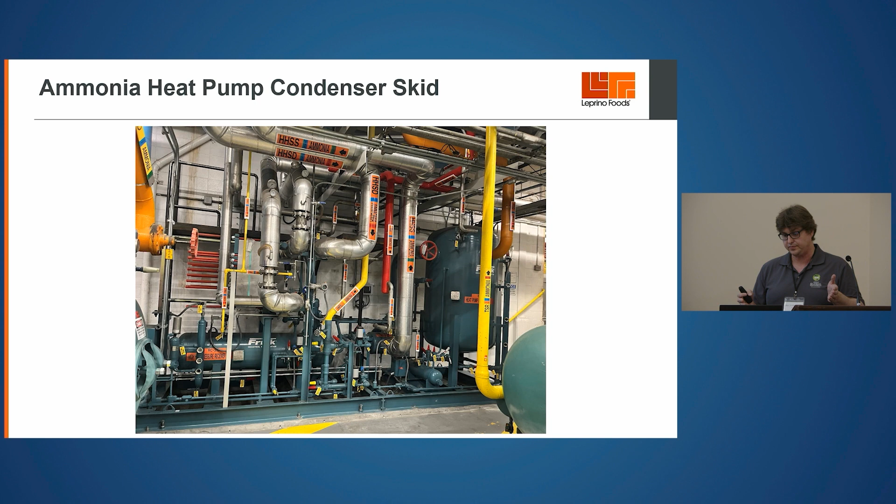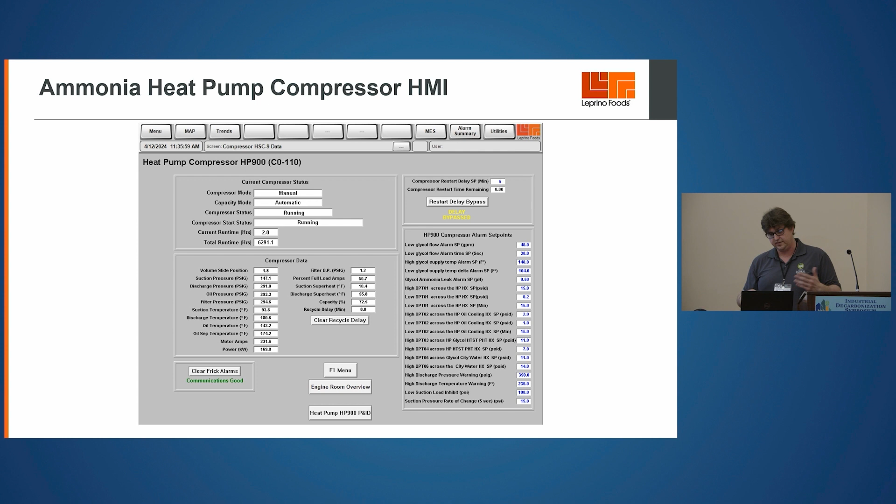So here's a little bit of what we have for our compressor setup. It tells us everything that's going on in our compressor, how it works, what's going on, functions, what we can control. And here's basically the main control loop of the system.

So we have one loop that's sending it to our milk HTST and controlling how it works. And then at night, when our milk HTST doesn't run—every day we do about 4 or 5 hours of cleanup, during which our milk HTST is not running—we run this heat pump for the hot water we're using in hoses for our clean-in-place processes for the facility.

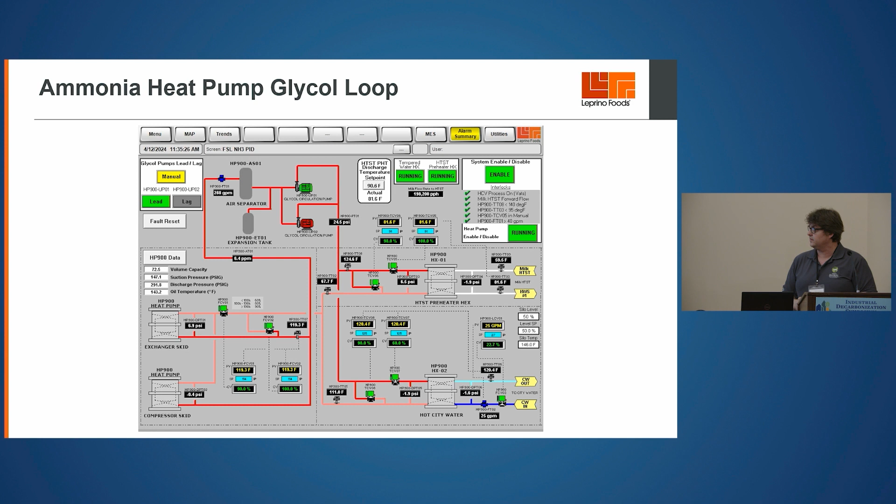So we have a tank, and basically we're supplementing the steam that's going to that tank because we want that water at about 140 degrees, and that's then at night. So the system can run 24/7, and we just balance out the loads it's going to take and how it's going to manage it. And that's pretty much it.